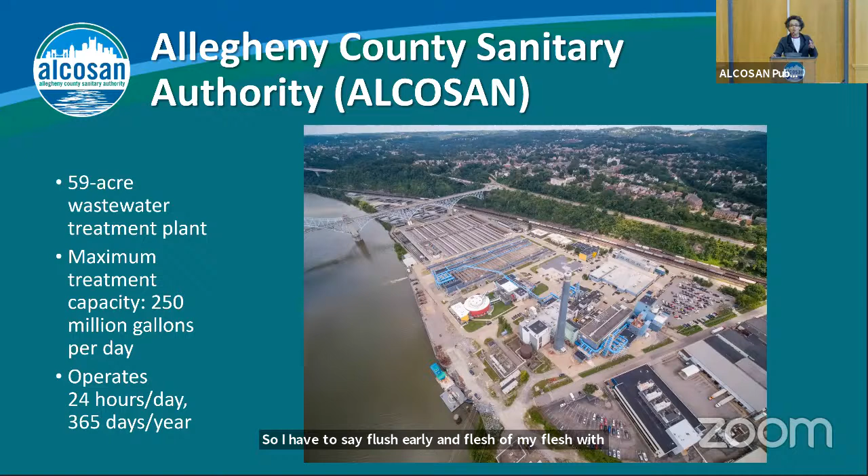Today, our agenda, again, focuses on the Clean Water Plan and provides status updates for where we are with respect to planning.

The plan has 4 primary components to improve water quality. That's what this is all about. That's what ALCOSAN has been all about since we were initially formed, improving water quality in this region.

Today, we're going to hear about how the Clean Water Plan and our ongoing implementation does just that with respect to 4 areas: expansion of the treatment plant that you just saw in the previous picture, and regionalization, our efforts to regionalize sewers within the ALCOSAN service area.

Source control and growth, that's keeping the flow out or minimizing unnecessary flow coming in, and a monetary support program - not just monetary, there's technical support, financial support that comes to bear through GROW, green revitalization of our waterways.

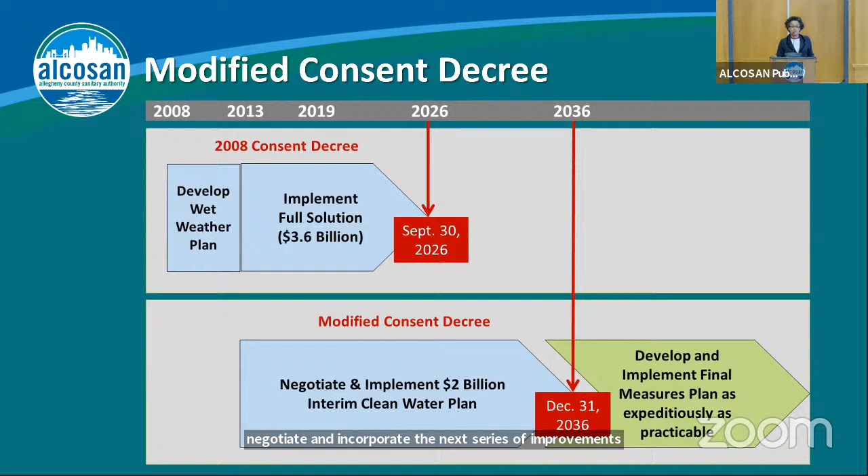A key component of being able to renegotiate the terms of the CD was gaining the ability to propose modifications as we step through this process. So again, $2 billion upfront or first phase investment in those components that you're going to hear about today: the plant expansion, regionalization, flow reduction / source control, and regional storage and conveyance tunnels.

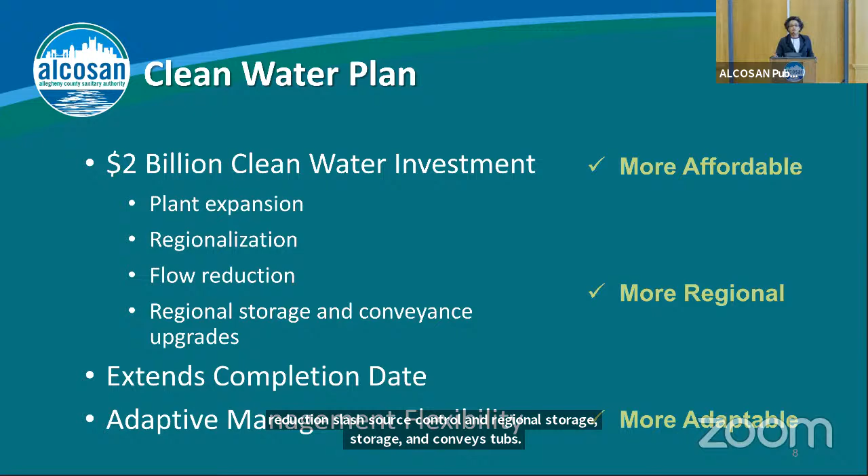The adaptive management piece is key. This simply lays out a time frame and framework for opportunities to incorporate adaptive management. And that is where we get the opportunity to step back and take a look at what we're proposing to see if there are opportunities to do just that, adapt and change with whatever makes sense at that time.

None of this do we ever do in a vacuum. We are working in conjunction with our municipal customers who supply all the flow to us. Sure, it's not surprising to anybody. We're not here generating flow. Well, we do generate some flow, but not enough to have to plan for it.

Again, the schedule, as you see it in front of you, lays out the tunneling program. It's not laying out the tunneling program because it is the only aspect of what we're doing, not because it is the primary aspect of what we're doing. Again, it is a component of what we have to do here, but it's a component with fixed scheduling right now. And as you can see, what we're trying to lay out for you here is we've got 3 tunnels that are proposed. The Ohio River Tunnel would be the first tunnel, which will be in design this year.

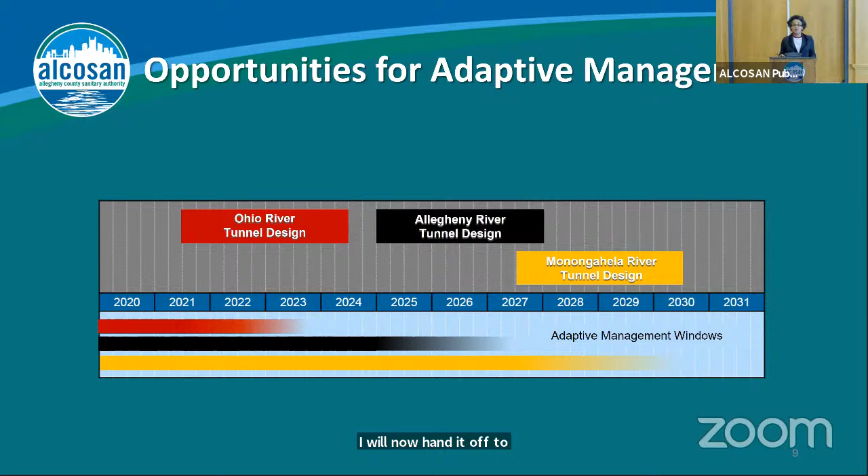This piece, the adaptive management concept, having it incorporated into our planning, I believe provides the flexibility that we need, creates opportunity for our municipalities to propose some different approaches, and meets the outcry that we heard with respect to what was originally proposed in 2012. I will now hand it off to Kim to talk about plant expansion.

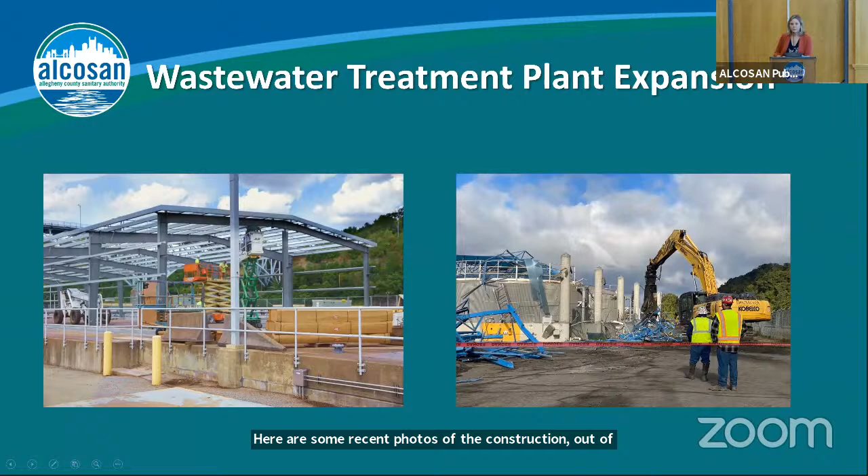Thank you, Arletta. So we are going to spend a few minutes talking about the wastewater treatment plant expansion program that we've been working on for quite a few years. Here are some recent photos of the construction down at the north end, which you'll hear a little bit more about in a few slides. Here again is our plant as it exists today with a capacity of 250 million gallons per day. We will get up to the full 600 million gallons per day with 295 of secondary treatment.

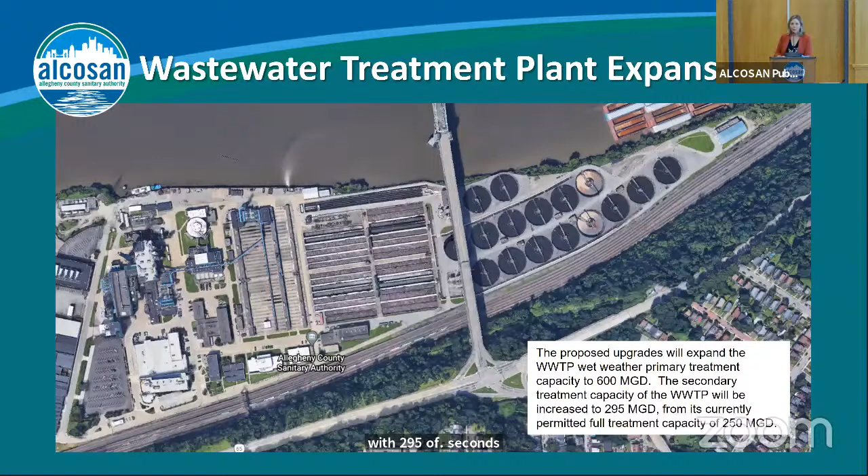How are we going to do this? Well, you can see at the far northern end of the site, those are the 2 additional secondary clarifiers and a new chlorine contact tank. That is what will expand the secondary treatment capacity from the 250 up to the 295. Right in the middle of the screen is where we will put in the secondary treatment bypass. So that is for flows over 295 but up to 600. There'll be a new outfall constructed there.

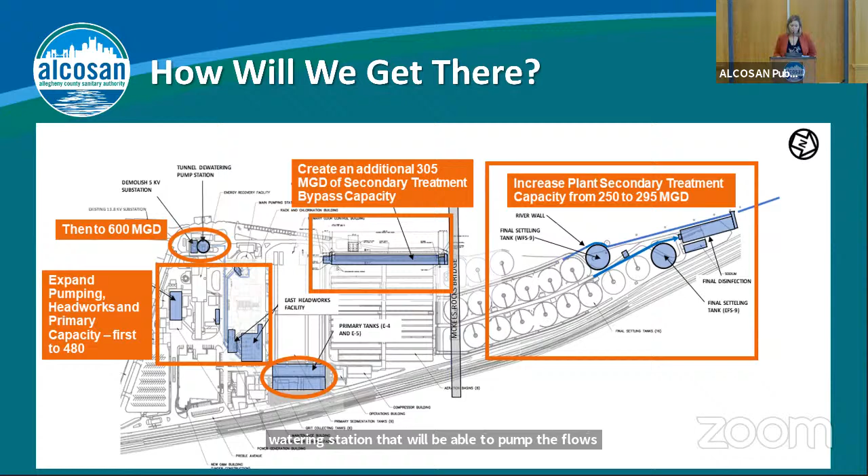Down at the bottom of the screen are 2 new primary sedimentation tanks, and then we are balancing out the expansion with increased headworks or primary treatment. And then last, but certainly not least, is the tunnel dewatering pump station that will be able to pump the flows conveyed by the new conveyance tunnels and enter into the treatment plant process.

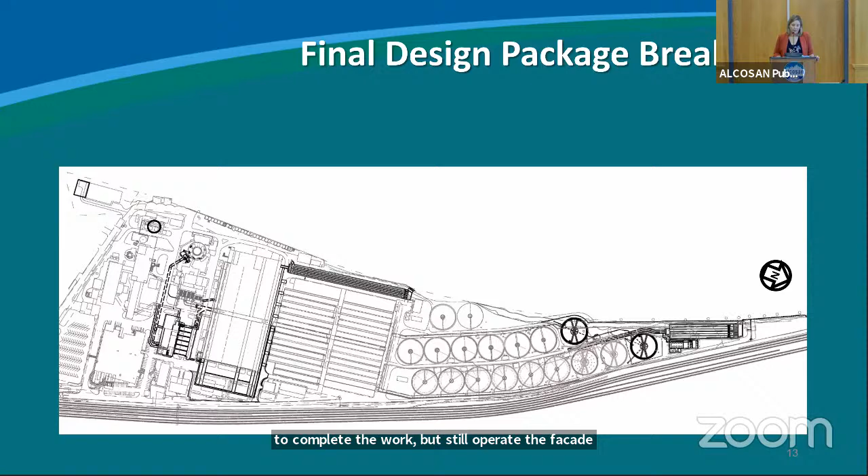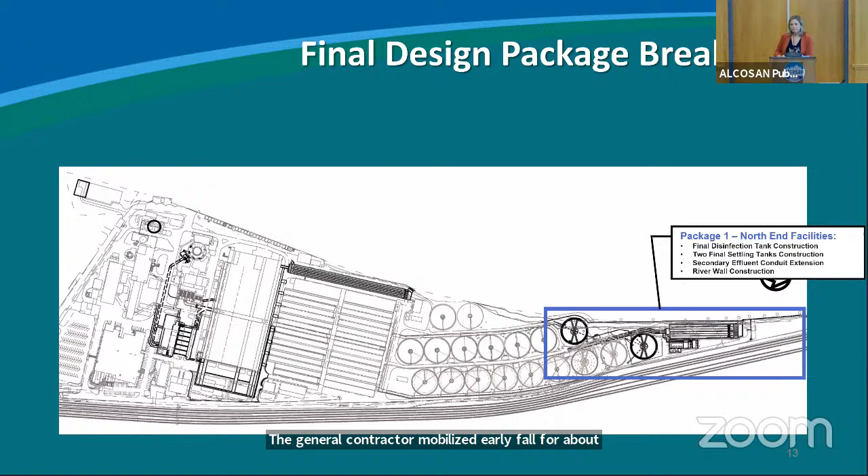So we had to break the designs into packages in order to complete the work, but still operate the facility 24 hours a day, 365 days a year. How are we going to do that? Package 1, this is under construction right now. This is what we call the North End plant expansion. We bid this project last spring. The general contractor mobilized in early fall for about $100 million worth of work.

The second package is electrical distribution system upgrades. So this is kind of a miscellaneous package. It's at about 90% design. It'll be bid this year. And this really frees the way for some of the other process improvements that are part of the plant expansion. So this is really a highly electrical package.

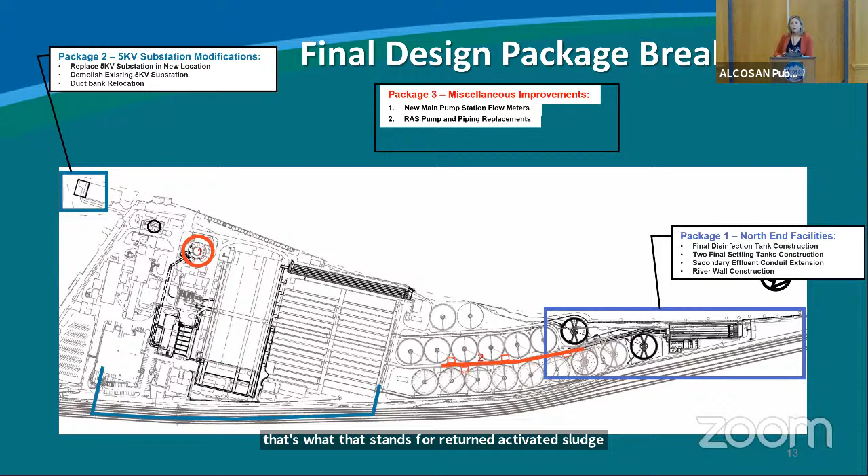So package 3 is actually comprised of 4 smaller jobs. This main pump station flow meters project is under construction. A couple of flow meters have already been installed, it's going well. The second is the return activated sludge. We see RAS, that's what that stands for, return activated sludge pump and pipe replacements. That has been awarded, and we are working through some shop drawings, and I would anticipate that the general contractor will be mobilizing soon for that work.

The third is a temporary hypochlorite facility, which is complete, and the project is operational because we had to demolish our existing hypochlorite storage facility to make way for the north end plant expansion. So that was an early project that was completed and is up and running. And then the last of the miscellaneous improvements under package 3 is some improvements to the effluent flushing water system. That's only at about 30% design, but it's coming along nicely.

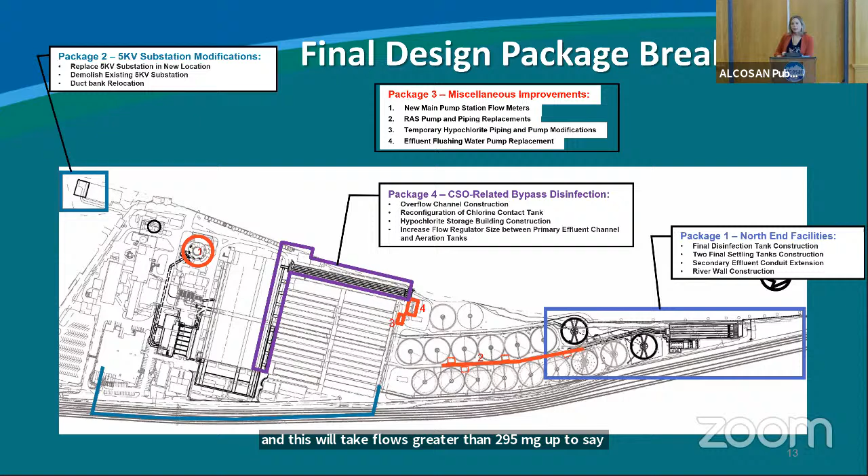Then we go to package 4. This is the CSO related bypass. This is what I was speaking of. This is a new outfall, and this will take flows greater than 295 mgd up to 600 and disinfect it. And there would be a separate outfall. Now this would only be active during periods of wet weather. This would not be active during dry weather flow or normal flow operations here at the facility.

Here is our East Headworks. So East Headworks is out for bid right now. This is probably the largest package of the final design wastewater treatment plant expansion packages. So this is brand new screenings and grit facilities, new building, and then conveyance over to the new facilities. If anybody's been to a board meeting, this would be located right outside of the boardroom where we demolished the old operations building a couple years ago. So again, that's bidding right now.

We do have to make some solids process improvements. So there will be the WAS, which stands for waste activated sludge, not to be confused with RAS, which is return activated sludge. But in any case, there will be some thickening centrifuges proposed for installation in our existing dewatering building. And that package would probably move into design later this year.

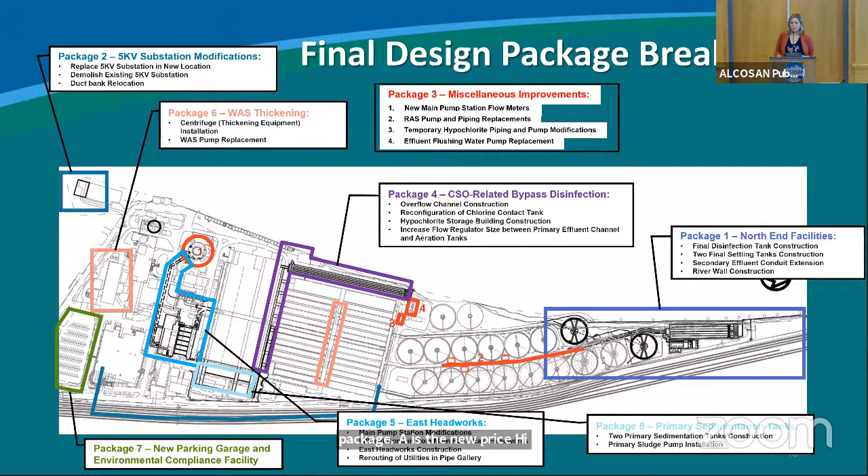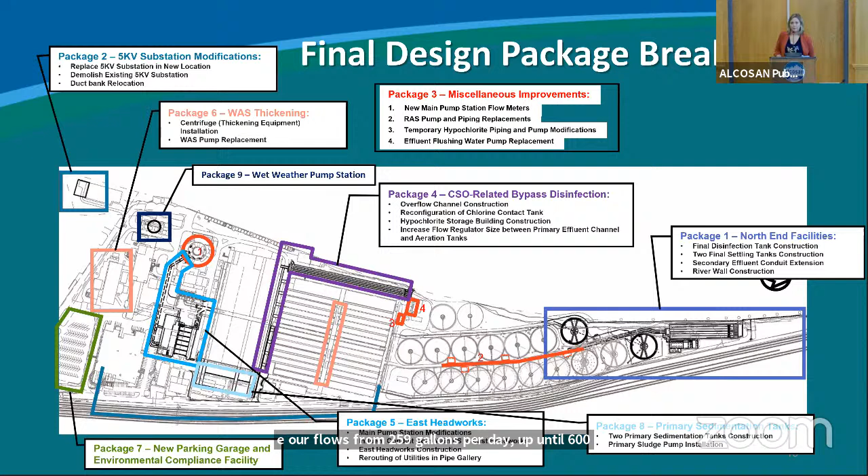Then package 8 is the new primary sedimentation tanks, which is a forcing function for needing that parking garage and environmental compliance facility. And then last but certainly not least, package 9 of 9 would be the wet weather pump station. And that would be designed and built in conjunction with the first phase of the conveyance tunnel, the Ohio River Tunnel. So that is our plant expansion, and the way that we broke it down so that we could have a phased approach and increase our flows from 250 million gallons per day up to 600 million gallons per day capacity.

And here's just a snapshot of where we are, sort of everything that I've spoken to. North End facilities are in construction. Package 2 is at about 90%. And the 3 sub-packages are mostly complete except for the effluent flushing water system, where the design has just started. We are just at the beginning phases of the design of the CSO-related bypass. East Headworks is complete. Bids are due in April.

The waste activated sludge thickening project will be out on the streets for design towards the end of this year. The garage bids are going to be due in March. And then the environmental compliance facility will be ready, but we can't bid that for construction until we have that garage built because of space issues. The primary sedimentation tank design RFQ will be the next RFQ out of the gate for the plant expansion projects. And then the last piece of the expansion will be the pump station, and that'll be a couple years yet before we go out for that design.

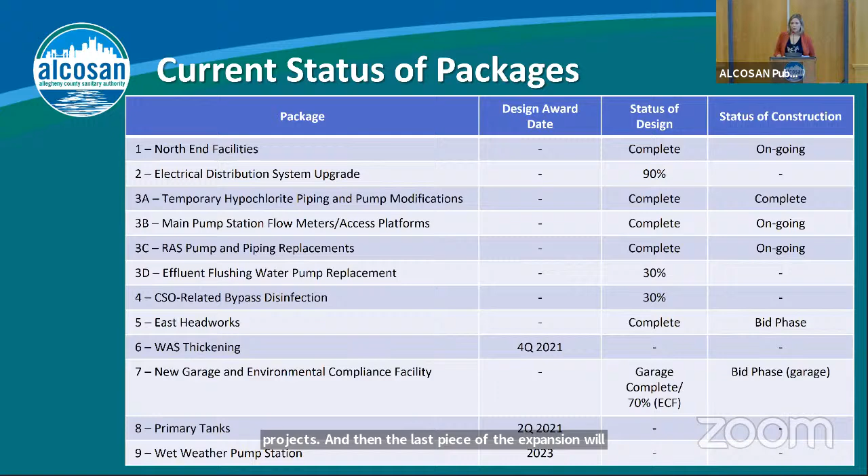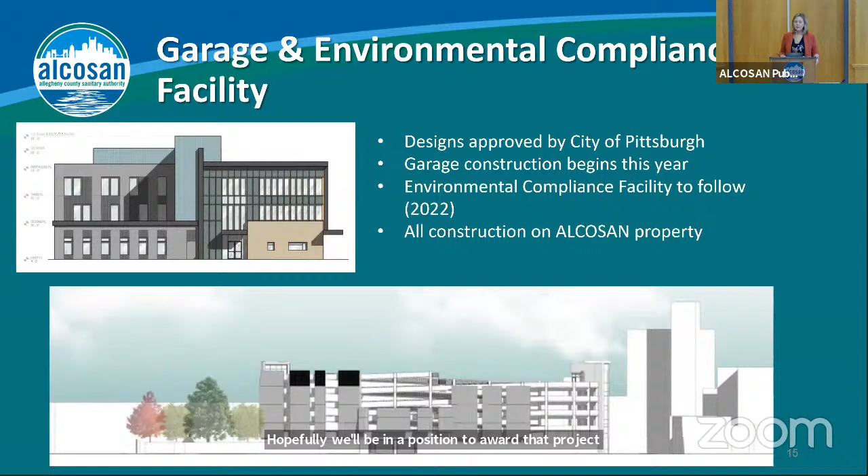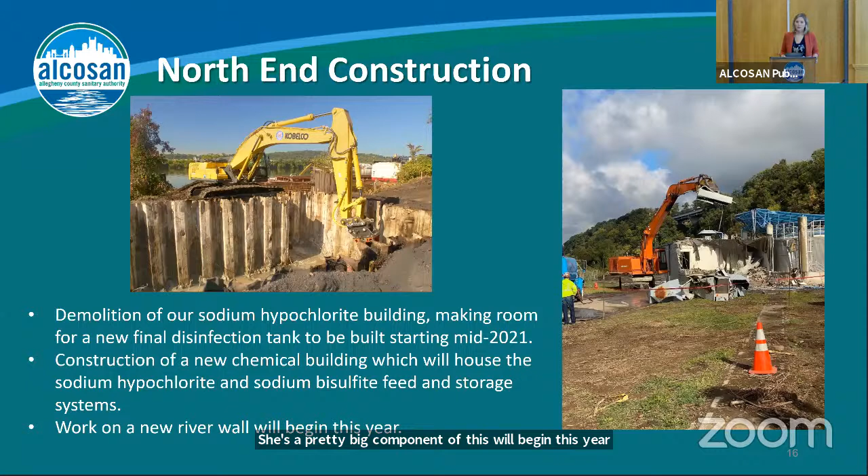And then here's just some photos from our north end construction. That has taken our secondary treatment capacity up to 295 million gallons per day. So this is the demolition of our sodium hypochlorite building, and also along the river there were some mooring cells that needed to be demoed. The work on the river wall, which is a pretty big component of this, will begin this year. And with that, I'll turn it over to Jan for regionalization.

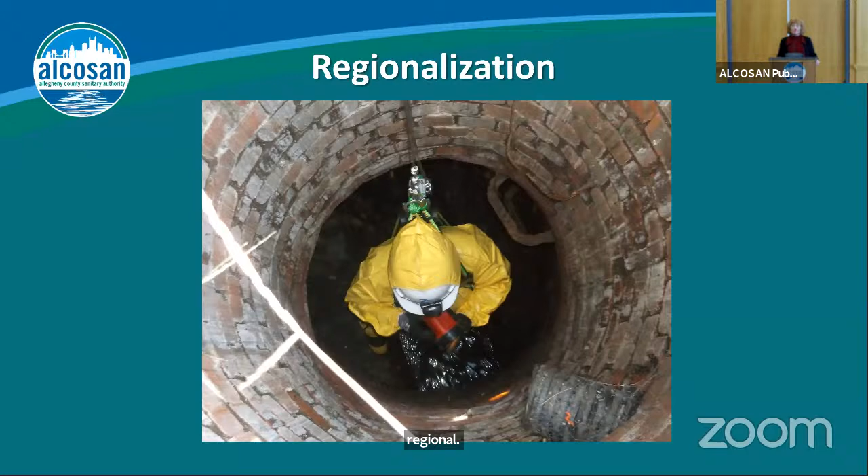Thank you, Kim. Regionalization is the component of the Clean Water Plan that includes the municipalities. We didn't get here overnight. It all started basically when ALCOSAN entered into its consent decree with the EPA, DEP, and the Allegheny County Health Department in 2008. Shortly after that, the municipalities entered into their orders with the regulatory agencies as well. It was that price tag, $3.6 billion to make these improvements, with $500 million of that being municipal improvements. So it was at that time ALCOSAN asked the Allegheny Conference to facilitate a regional stakeholder panel.

That panel consisted of environmentalists, municipal managers, elected officials, business leaders, and we all met together to talk about what portions of the municipal systems could be run by ALCOSAN. That culminated in 2013 into the Cohen Report, and it became the product of the Regional Stakeholder Panel.

A group called, which they affectionately refer to themselves as SRIC, Sewer Regionalization Implementation Committee, took it from there to determine what actual portions of the system should transfer. So in 2015, it was recommended what portions the municipal sewer should transfer, and ALCOSAN moved forward in investigating what the condition of these sewers were.

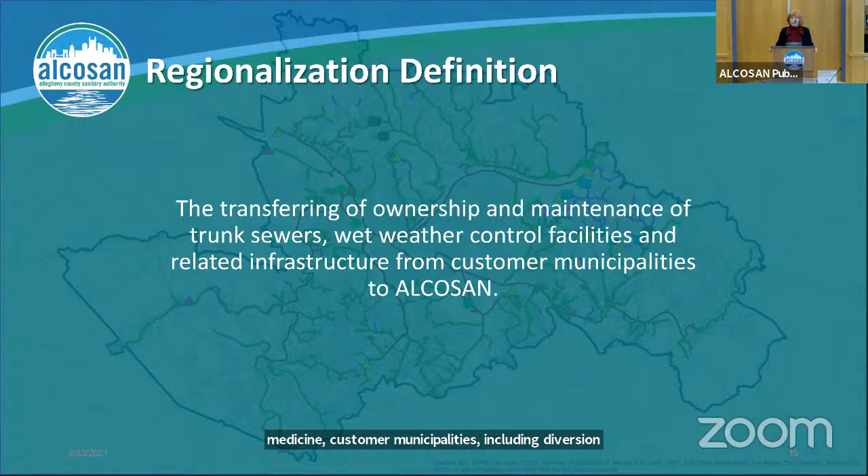So the sewers to transfer are multi-municipal sewers, meaning more than one municipality has sewage flow in that sewer. And that sewer is also 10 inches in diameter or greater. And when we did all of the inspection and went back and worked with the municipalities on the mapping of what constituted that multi-municipal sewer 10 inches in diameter or greater, we come up with 265 miles of sewers that would regionalize.

Along those sewers, there were 8 facilities. 4 of them were equalization tanks and 4 of them were pump stations. Approximately 6,200 manholes along these sewers and 77 diversion structures with overflows. These would all become sewers that would go from the municipalities to ALCOSAN for operation, maintenance, and ownership.

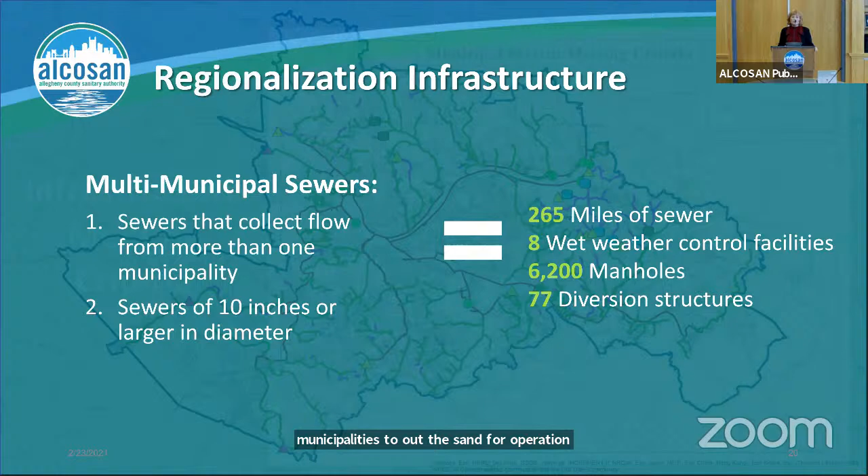This is a depiction of what that looks like. Currently, ALCOSAN has sewers that run along the Allegheny, the Ohio, and the Monongahela River, also Chartiers Creek, Sawmill Run, and Turtle Creek. It's approximately 90 miles of sewer.

So the new sewers, that 265 miles of sewer, are shown by the green lines. That would be the new sewers, the 265 miles to transfer to ALCOSAN. Our service area is delineated by the blue line. It's a 300 square mile service area.

The triangles are pump stations that would transfer as part of the regionalization process. They are pump stations that exist along the regionalized sewers. And then the cylindrical shape, those are equalization tanks that were constructed by the municipalities. They retain flow during wet weather periods and then release that flow back to the sewer system after it quits raining and flows have subsided.

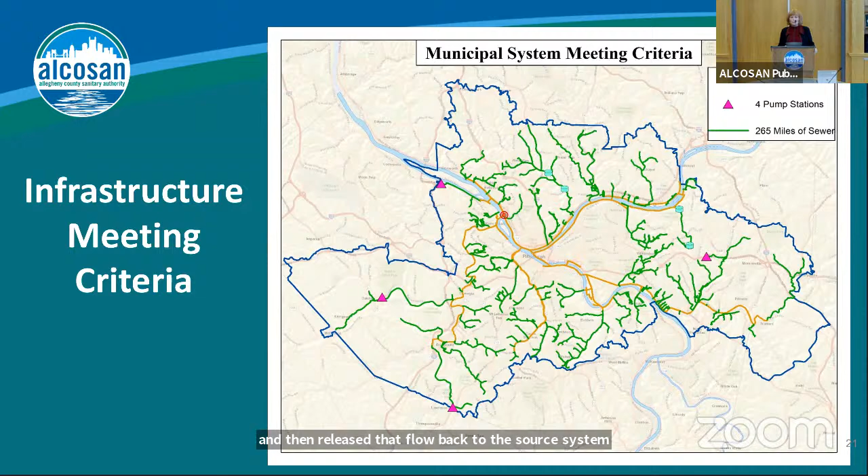So why we want to do this, I mean, in all honesty, we have minimal sewer system as it is today. The 90 miles of sewer system were constructed in the early 50s, and we just accepted that the municipalities would continue to maintain and operate their own systems.

So it's really a regionalization will bring us up to where a lot of cities are across the country that have more than that 90 miles of sewer to operate and maintain. I mean, it improves the management of the system, and there's an efficiency in the costs. The maintenance and improvements, ongoing maintenance and improvements for the clean water plan are significant.

It also promotes collaboration between ALCOSAN and its customer municipalities. So we talked about in 2010 dollars, there was a $3.6 billion price tag. As I mentioned, $500 million of that was for the customer municipalities. This enables us to make improvements that will collaborate with the clean water plan.

It establishes a regional system. That regional system will allow us to take advantage of some of the programs EPA has recently implemented. This integrated watershed approach will allow improvements to be made where you see the best bang for your buck in water quality improvements, and it contributes to the clean water plan.

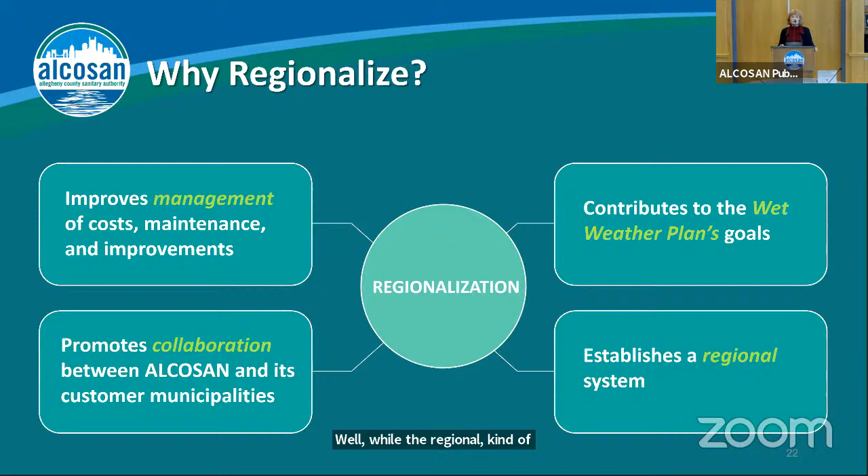Progress to date, there was a lot of planning and outreach. We did not do this in a vacuum. We met with our customer municipalities. We had almost 100 meetings to discuss the maps, the direction of the flow, and what condition the sewers were in.

We performed the inspections and did defect reports. They were developed very complete and comprehensive with mapping and sewer defects identified where they're at within the sewer system, and recommendations about what type of improvement should be made.

We did facility inspections and evaluations, and we have broken those into design packages where they are looking preliminarily at what improvements should be made to the sewer system. We'll share those costs with the municipalities on a 50-50% basis.

With the defects in the sewer, the municipalities have to make the improvements to the sewers where there is imminent failure possibilities. And then the remaining defects will become part of ALCOSAN's capital improvements program.

We have provided municipal agreements to the municipalities that identify all the needs that we have in terms of easements and past maintenance records and as-built drawings. We have the conditions of the transfer of the sewers laid out in that agreement, and we are putting those together and taking them out to the municipality currently.

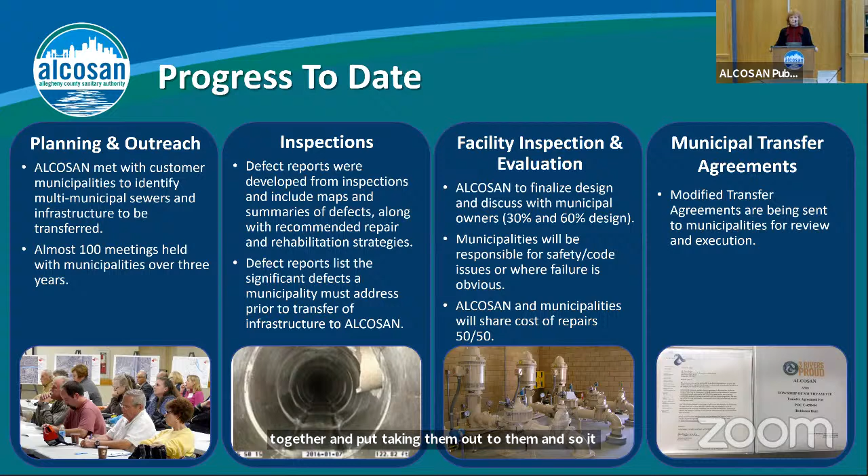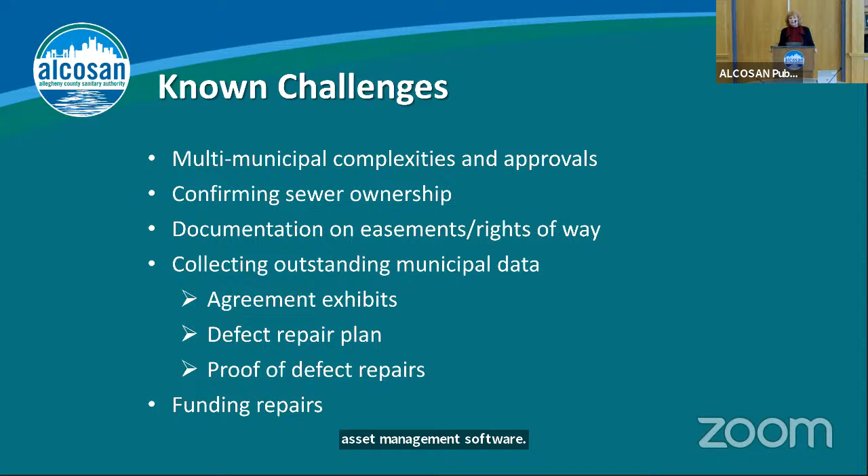We will collect the outstanding municipal data that's proof of the defect repairs. We're trying to collect that information in a manner that it can be placed into an asset management software so that we can manage the system that we will be obtaining, as well as we manage the system we have today. And just the funding of the repairs will be something that we will be challenging way into the future.

But I think in this manner, regionalization will enable it to be done in the most cost-effective manner possible. And that is my discussion on regionalization. I'll pass it over to Tim Prevost for source control and GROW.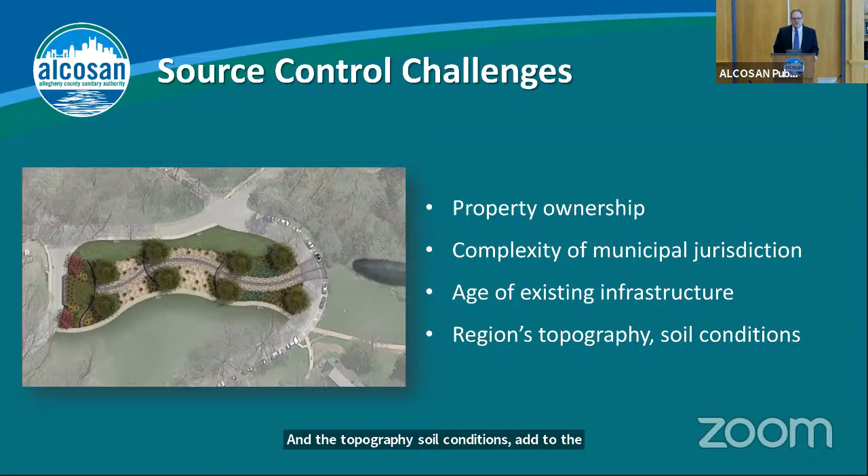How did we get here? During the development of the wet weather plan, ALCOSAN released its draft. And in the public comment, there were some concerns about the role source reductions would play in our plan. So after we submitted our wet weather plan, ALCOSAN began to meet with public officials to determine whether or not there was interest to implementing source reduction projects throughout the service area.

During these collaborative efforts, we started to pull together a report that culminated in 2015 with Starting at the Source. Starting at the Source identified several projects, over 200 potential source control opportunities throughout the service area. And it also laid out some initiatives. One of those initiatives was an incentives program to which ALCOSAN could help the municipalities fund these projects through an incentive program.

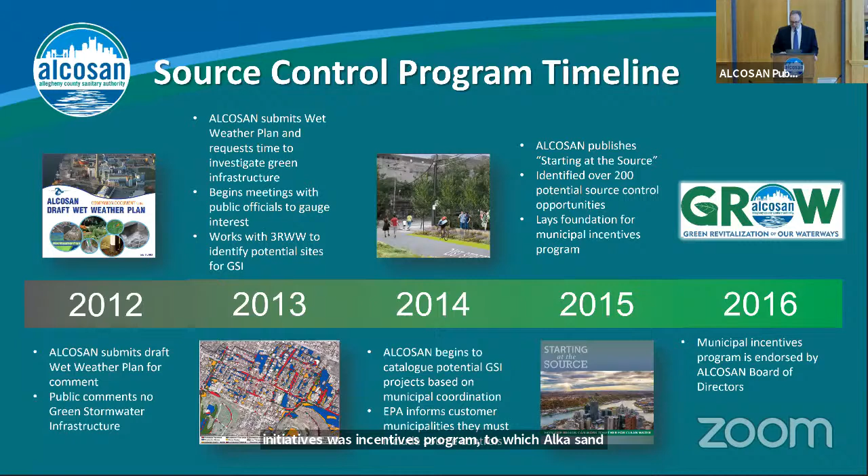To do the incentive program, you need to lay out all the different factors that would go into a project like this. And also, it needed to be fair. So the municipalities, they needed to own, operate, and maintain the projects. These would not be ALCOSAN projects, these would be municipal projects. It had to be fair among all 83 of our customer municipalities. Source controls had to be for not just combined sewer systems, but also for separate sewer communities.

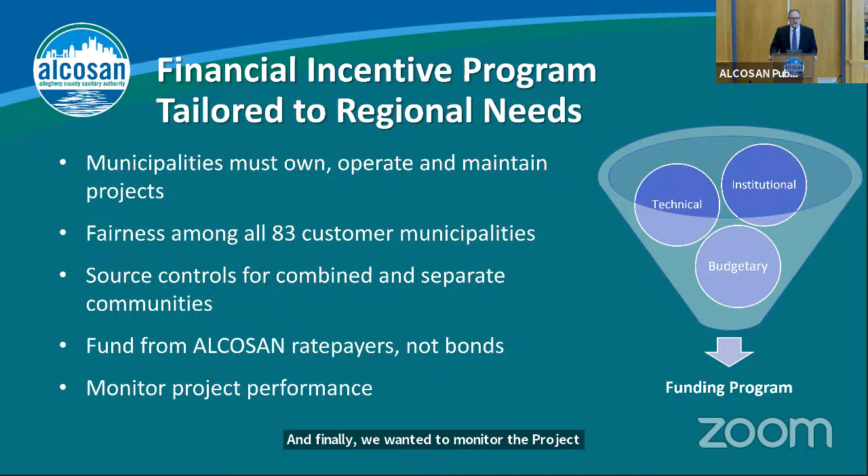One of the challenges that we faced regarding funding this was we could not use bonds because they were not going to end up being ALCOSAN-owned projects. So the funding is coming from ALCOSAN ratepayers. And finally, we wanted to monitor the project performance to show the investment that has been made to the region was well worth it.

So we started the GROW program in 2016. As Arletta mentioned before, it's about green revitalization of our waterways. The goals of the program are to construct projects that reduce sewer overflows and reduce the amount of stormwater entering into the collection systems.

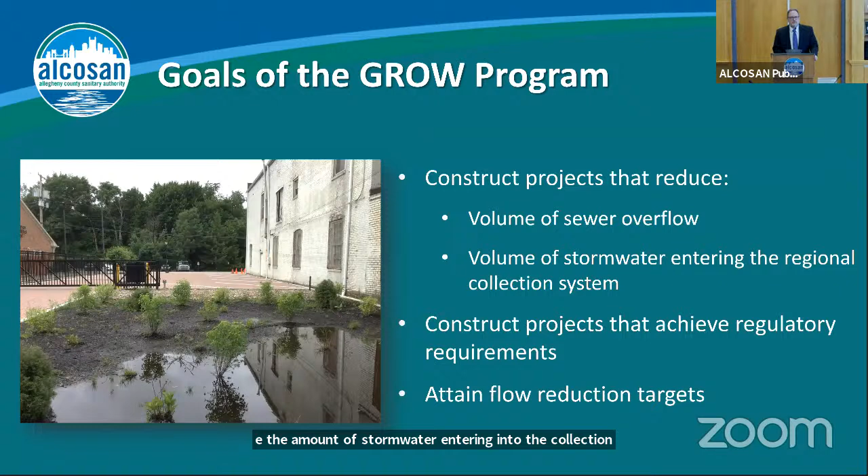These projects should try their best to achieve regulatory compliance and attain flow reduction targets.

Some of the program requirements: the main requirement is that you must be an ALCOSAN customer municipality or a municipal sewer authority within the ALCOSAN service area. If you are neither one of those, the GROW program is not eligible for you.

Through the program, we are trying to demonstrate the most cost-effective way to reduce sewer overflow volume, or the amount of flow entering into the regional collection system. That is how we determine the match that the applicant would get.

Each of the applicants must own or have the legal rights to the sites. Again, we are monitoring the progress of these projects. We have pre-construction monitoring and then post-construction monitoring, and then we make the determination of how effective this project was.

One of the most important aspects of the program is a 20-year O&M responsibility. To fund this project, we had to be assured that there is going to be a long-term obligation to the municipality to maintain these projects.

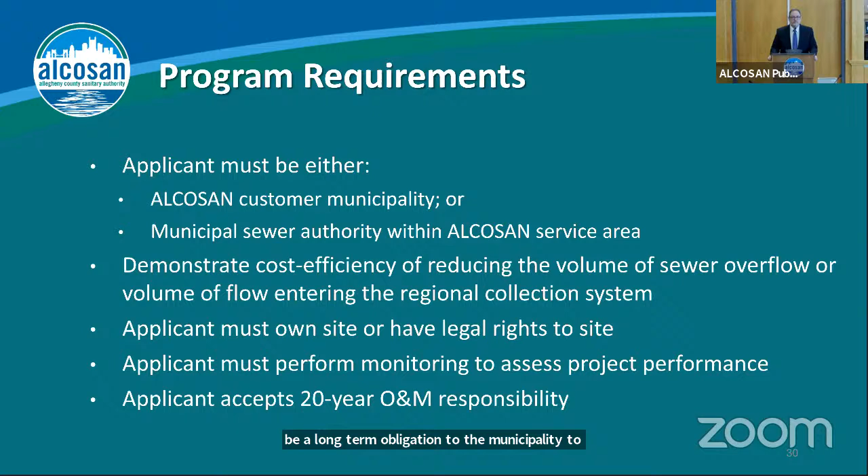There are 4 eligible project types in GROW. There's green stormwater infrastructure, which tries to mimic the natural environment in addressing stormwater coming down the system before it enters into the sewer system.

Inflow and infiltration, which addresses defects in the pipe that allow water, mostly groundwater, to enter into the sewer system.

Direct stream inflow removal: throughout our service area, we have some locations where streams were piped into the sewer system, and we are trying to get those out. That allows a lot of water in wet weather to enter into the sewer system and is a main component to some overflows. And finally, sewer separation.

Combined sewer systems might be able to have that stormwater piped into a new system and directed to a waterway, removing it from a combined sewer system.

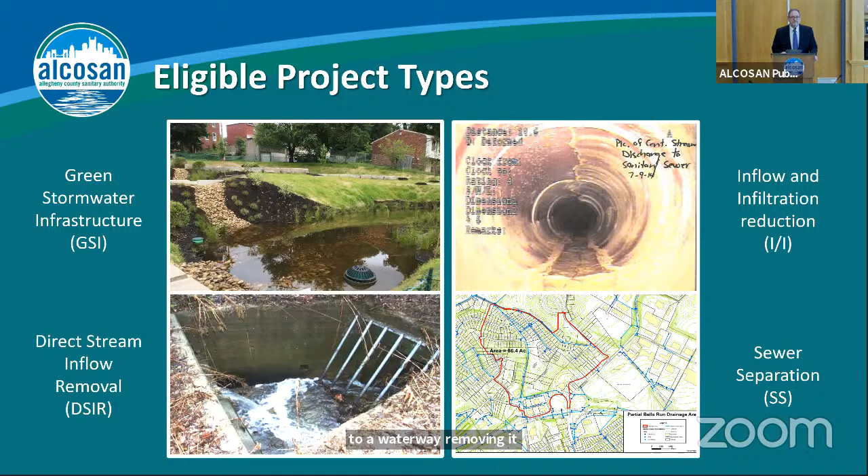When we started, we were open to conceptual designs with GROW. The award range was 85 to 25%. Our monitoring requirements were not as well defined as they are now, and we had a maximum award of $1 million per project per cycle. In that first cycle, the process was developing during the implementation.

Now, where we're at, there are certain design criteria a project must have. If it's below $1 million, it needs to be at 60% design. If it's above $1 million, it needs to be over 90% design. The award range was increased from 85 to 15%. The monitoring requirements are very well defined, and the maximum award has been raised up to $10 million per project. The process is now defined very well, to a point where it's repeatable cycle by cycle.

Some of the GROW statistics we have right now: we're through our 5th cycle. Approximately 187 million gallons of overflow reduction are estimated. We have offered $43.76 million in grants for 126 projects. Throughout the entire service area of 83 communities, 48 of our municipalities and municipal authorities have been offered and awarded grants.

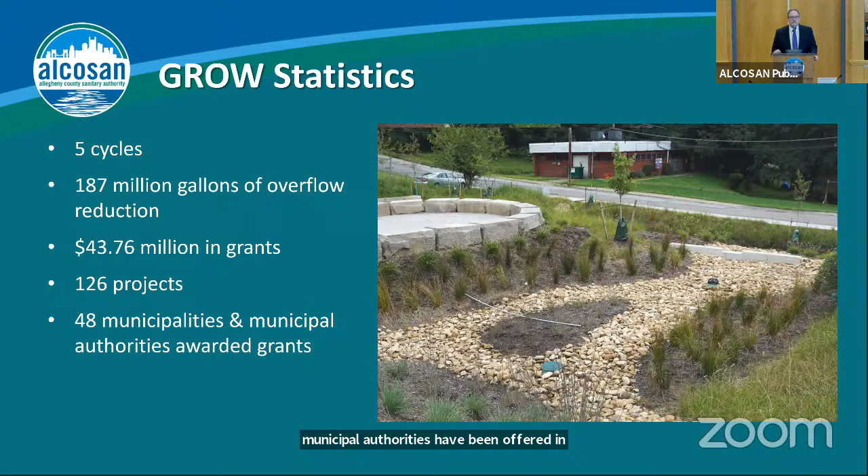So while we were implementing the GROW program, we also wanted to have a follow-up to our Starting at the Source report. That report is called Controlling the Source, and it can be found on the ALCOSAN website. We have an executive summary for someone who wants an abridged version, the full Controlling the Source report, and we also have a web map, which gives us a graphical interface of all the projects that have been identified or implemented through GROW.

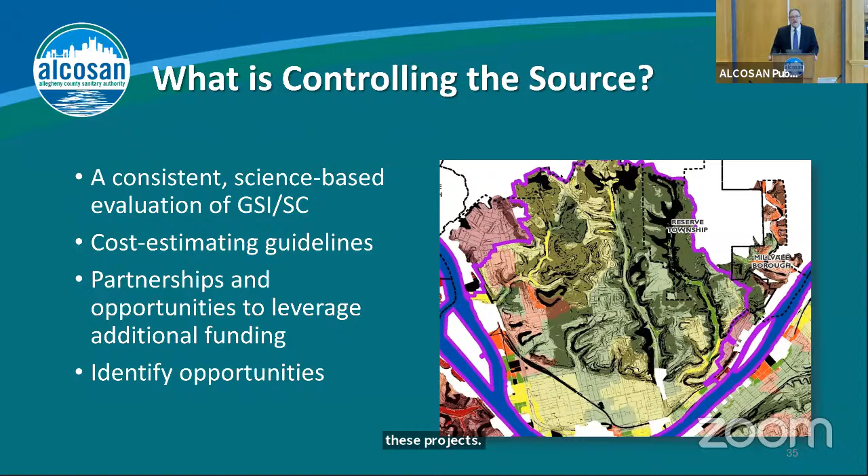So what is Controlling the Source? It's a science-based evaluation for green stormwater infrastructure and other source control projects. We identify cost estimating guidelines to give some guidance toward the most cost-effective projects available. We try to identify opportunities to leverage additional funding so that municipalities would have less of their municipal budget put into these projects. And finally, we go through the service area and identify opportunities to implement source reduction projects.

Green stormwater infrastructure is one of the 4 main source control projects we worked with. In controlling the source, we identified over 195 potential locations. Some were very strong, highly ranked projects, some were medium, and some were low ranked. We shared all of this information through the report back to our municipalities.

Of these green stormwater infrastructure projects, they are located in 20 municipalities. We are trying our best to have occasions where we can discuss these opportunities with the municipalities to see if they are interested in implementing them and working with them through GROW to help fund it.

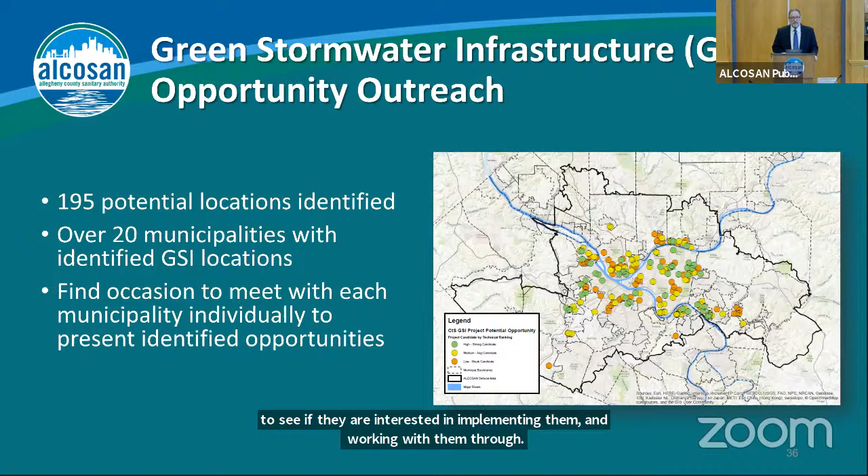Some early progress: Rankin submitted a project in their ball field in cycle 5. Currently, Sharpsburg is working on advancing a green infrastructure project in their Kennedy Park.

During the development of controlling source, we've shared concepts and background information with our stakeholders. We provided the green concepts to the communities when we published the report, and we are currently collaborating with PWSA and the City of Pittsburgh on green stormwater projects throughout the early stages of their project development, so that we know when these projects are coming. We can take an early look at how effective these projects are and also provide some collaborative feedback to them.

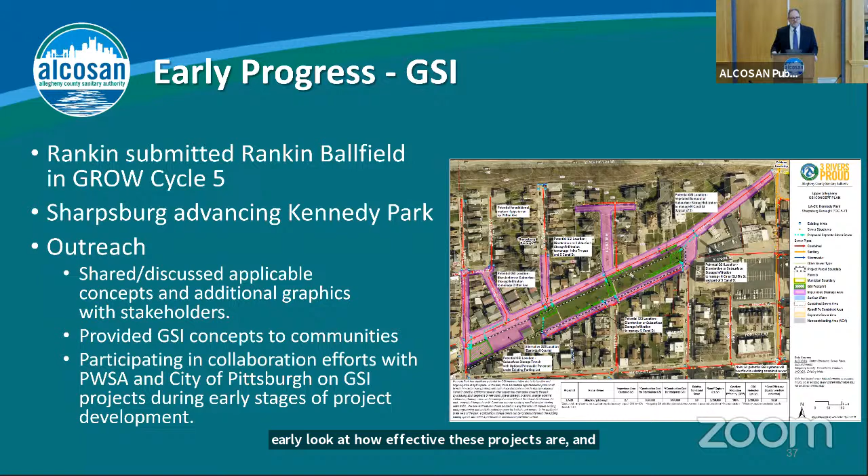I&I reduction opportunities has been in process since 2016, when ALCOSAN began doing flow monitoring throughout the service area. What you see on the left are several locations, points of connection: Streets Run, 9 Mile Run, Homestead Run. These locations are places where we did a very detailed flow monitoring program.

After we did the flow monitoring, we conducted flow isolation studies, and on the map you see the results. Areas that are in orange or red have excessive inflow and infiltration coming into the system. We will work with those municipalities to try to identify projects that address them, and if there are locations where we can overlap with defects that need to be addressed through regionalization, we're trying to address 2 programs at once.

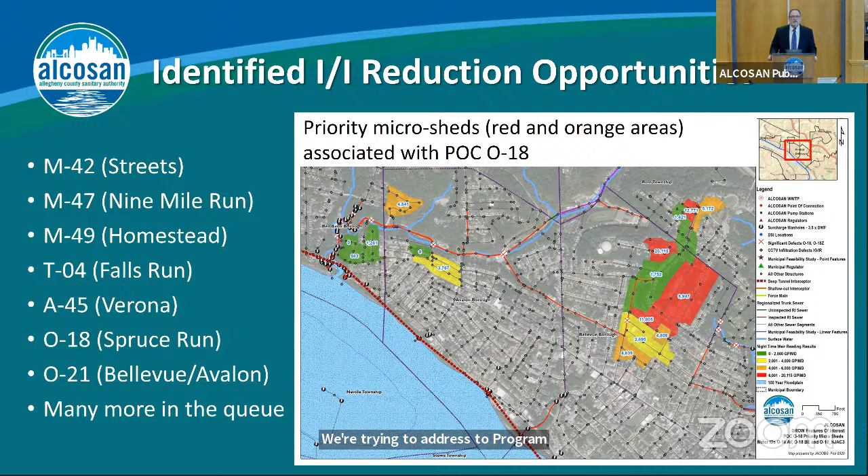Some early progress: Streets Run communities recently signed a memorandum of understanding to move forward with a major project within the trunk sewers along Streets Run and Glass Run, which will help with their regionalization defects.

We're trying to duplicate that effort in 9 Mile Run, M47, with those communities to put forward a multi-municipal I&I source control project through GROW. We're currently working with Homestead Run, Munhall Sanitary Sewer Municipal Authority, to identify where some I&I projects could be within their community.

There are more communities that we are going to be working with as we continue the monitoring programs.

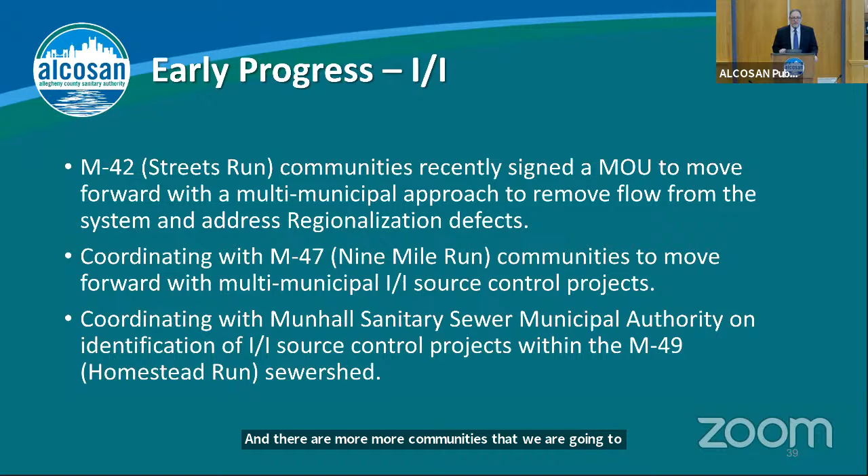Sewer separation is an opportunity that we believe is out there throughout the service area. We want to ask the question: is sewer separation more cost efficient than constructing a consolidation sewer to get to our tunnel? Is sewer separation better for overall water quality? Maybe the best answer is to keep everything the way it is and address it with green infrastructure instead. Where are the best locations for sewer separation? We are looking at all of these questions and providing answers through controlling the source.

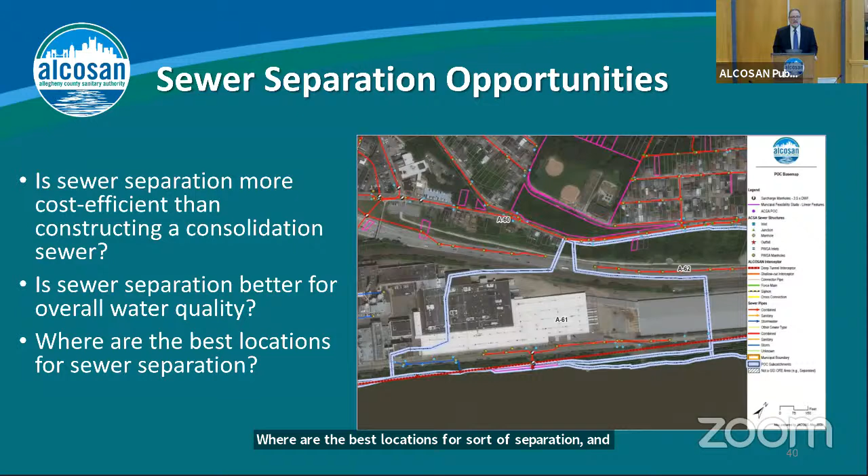Finally, we identified some direct stream inflow removal opportunities. We had previously known about 33 locations where stream inflows were located. Through some geographic information system methodology, we identified 44 new locations throughout the service area, which we validated through field visits. Based on those field visits, we identified 15 locations where we put together a feasibility study to see how feasible it would be to remove these locations from the service area.

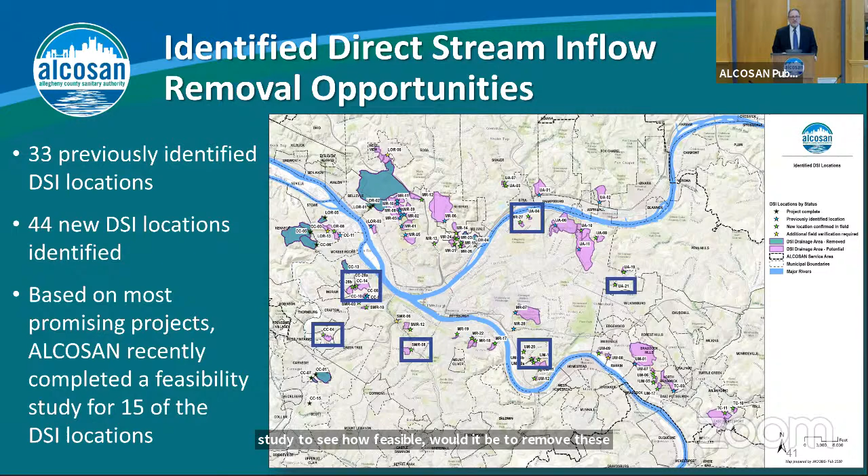Some projects currently in the queue: the Delafield Avenue stream removal is a major project with Fox Chapel, O'Hara Township, and Aspinwall Borough. The flow coming down the watershed sometimes floods Delafield Avenue. We are trying to work with the Army Corps of Engineers to find a solution to get that water out of the combined sewer system and into the river.

Currently, next door in Sharpsburg, we are working with O'Hara, Shaler, and Sharpsburg on a Ravine Street project, which is a collaboration with those municipalities and also PennDOT. Construction is to begin very soon, in the spring of 2021.

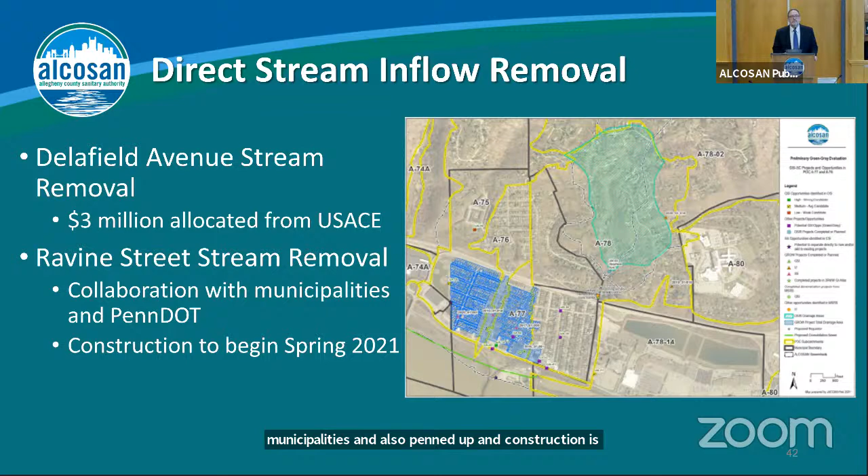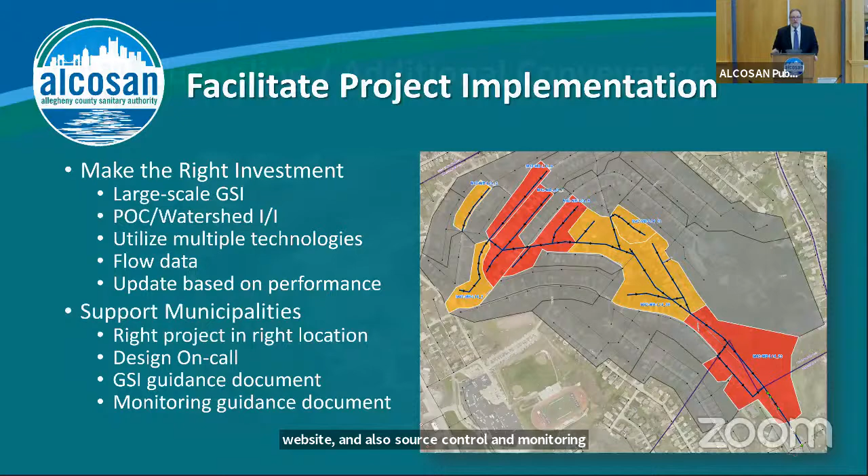With that, I'll turn it back over to Kim for discussion on the tunnels.

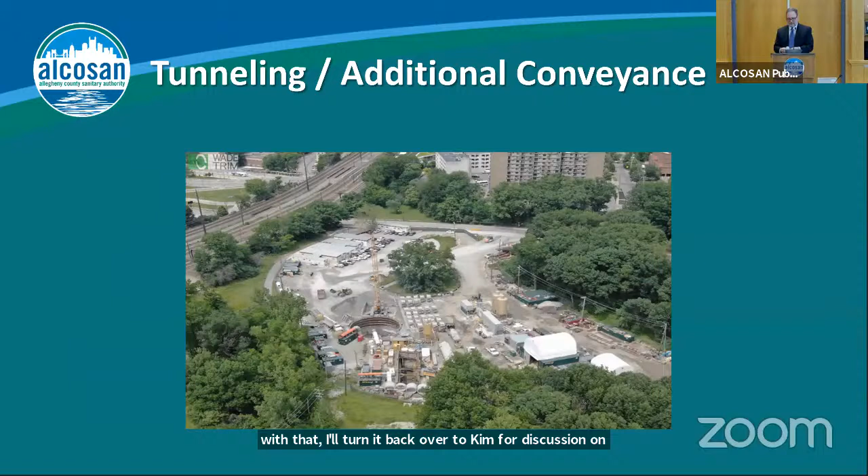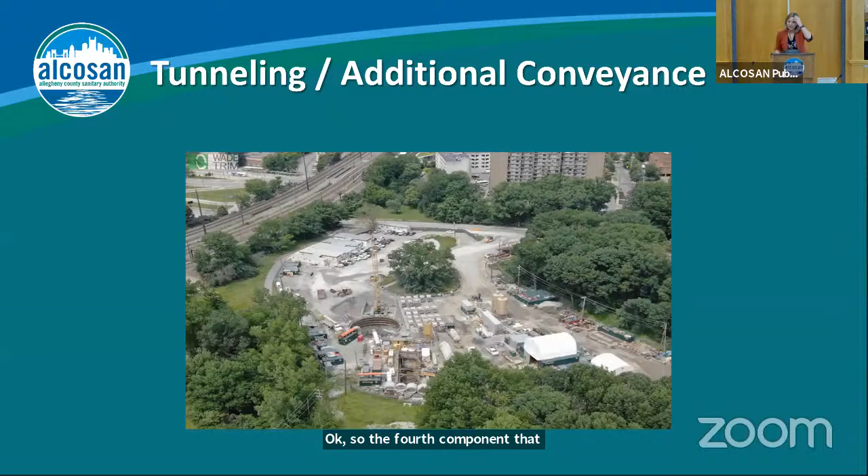Thanks, Tim. So the fourth component we're going to talk about today is the additional conveyance to get the flows to the plant. In other words, the tunneling.

In October of 2020, we met a fairly significant milestone in that we submitted the basis of design report to the regulatory agencies for their review. That was about three years plus worth of work to further dive into the new conveyance tunnels and the required associated facilities to capture and convey the flows to reduce the combined and sanitary sewer overflows. So the basis of design report recommends the size and alignment of the new tunnels and balances that out with all of the other associated elements required to be in compliance.

The preliminary planner, who is the team that did the work for the basis of design report, also worked with the wastewater treatment plant program manager and the GROW program manager to optimize the facility so that we weren't working in silos. We were looking at everything holistically to get the best solutions. The basis of design report will provide the basis for now springboarding into the final design. Like Arletta said, the Ohio River Tunnel will go into final design in 2021. The basis of the design has been laid out in this report.

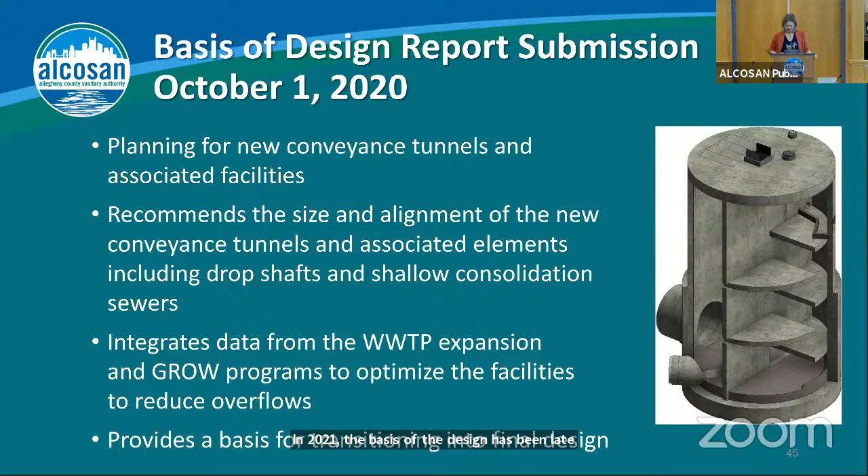So the associated systems we speak of include the tunnel legs, but also regulators, consolidation sewers, and the drop shaft - basically a vertical sewer to take the flow from the surface sewers down into the deep tunnel - and the adit, which takes the flow from the drop shaft over and connects it into the tunnel. These are the associated facilities with the tunnel system, and words we'll be hearing for the next couple of years.

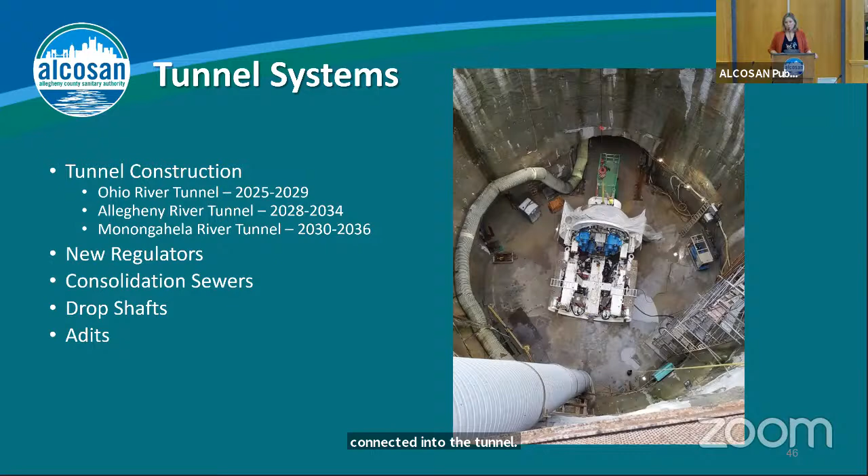So here is the current proposed horizontal alignment. Here is the Ohio River Tunnel, 18 feet in diameter, about 24,000 linear feet. Next in the queue would be the Allegheny River Tunnel, again 18 feet, 28,000 linear feet. And then last but certainly not least is the Mon River Tunnel, again at 18 feet. So the whole system is at an 18 foot diameter.

And then there is a Chartiers Creek Tunnel that will go over and pick up the McKees Rocks area, the bottom of Chartiers Creek, proposed at this time at 14 feet diameter. And then last but certainly not least is our river crossing over to Saw Mill Run to pick up the bottom part of Saw Mill Run. So that right there is our current proposed horizontal alignment as laid out in the basis of design report.

Pay attention to the notes on the side - these will be refined further as we get into final design. This is at the 15 to 20% design at this time. There will be very little disruption. This is very deep, 150 feet deep on average, so the only surface disruption would be when we are connecting to the tunnel at our drop shaft locations. ALCOSAN will be working with the applicable neighborhood organizations throughout the design and construction phases, really to work and coordinate our work with all of you.

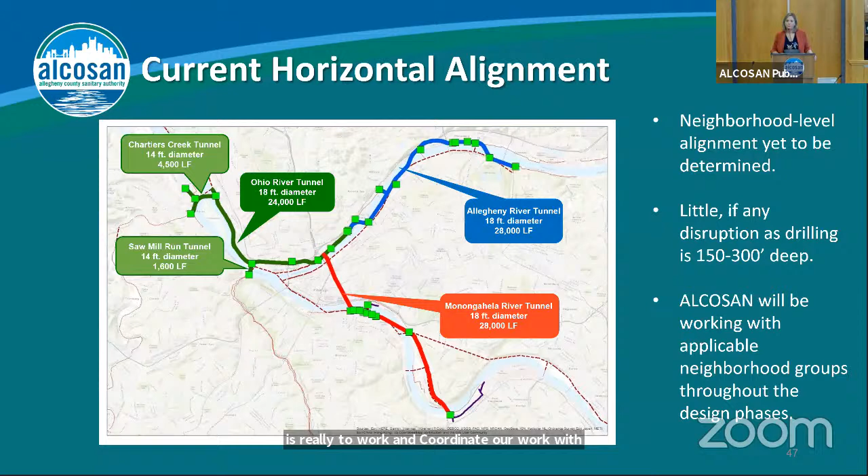We've done about 77 deep geotechnical borings to date. There will be many more geotechnical borings forthcoming during the final design phases, but getting a very, very good understanding of the geology will be a critical component of the final design process.

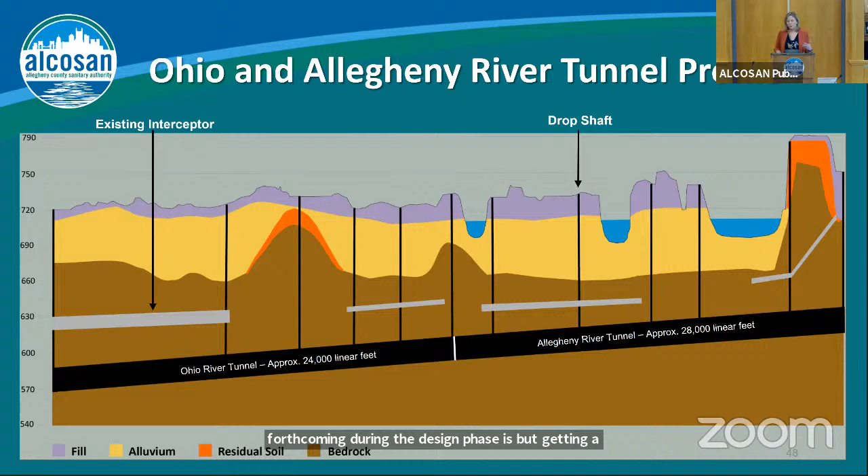So these are sort of some of the highlights that were established through the basis of design report and the preliminary planning process. One pass system is what is being proposed. We have been looking at the best approaches for groundwater control and have put forth some recommendations, and we'll continue to look at that for what's acceptable in the industry and what other communities have also learned from.

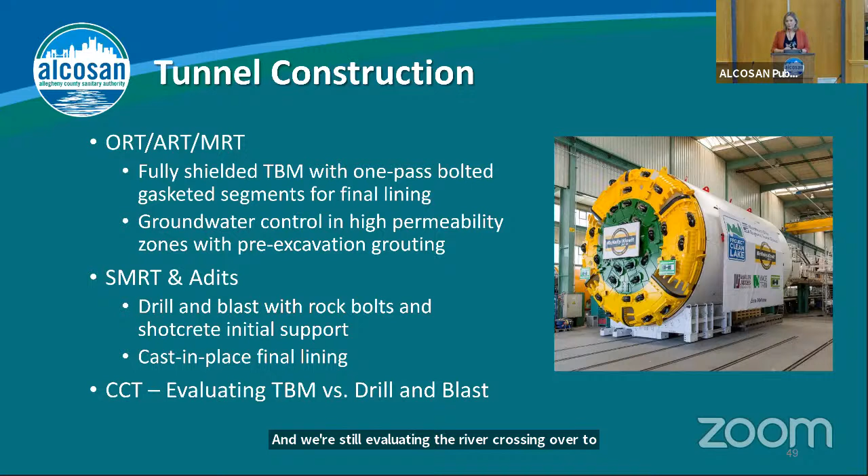So the adits, which are the connections from the drop shafts over to the tunnel, and then the Sawmill Run river crossing, those are proposed to be drill and blast. And we're still evaluating the river crossing over to the Chartiers Creek to pick that up, whether or not that would be a tunnel boring machine or drill and blast. So those are some of the decisions that will be made as we move into final design.

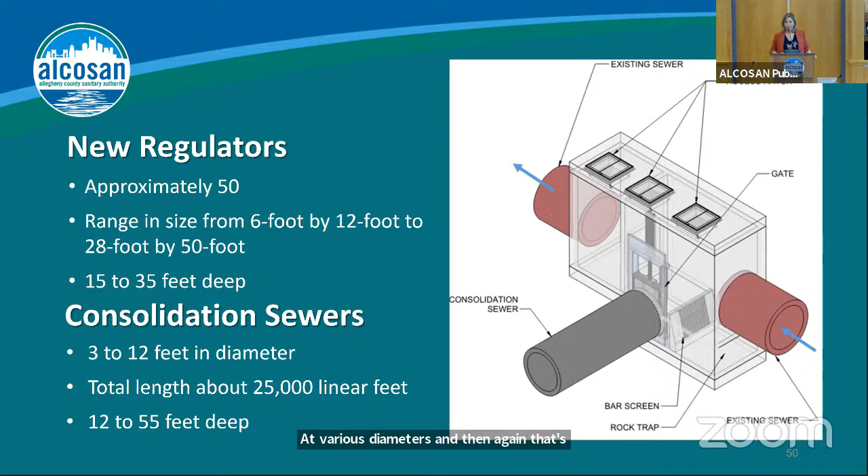And then we've got to get the flow to the regulators, and that's where we will be proposing consolidation sewers at various diameters. And then again, that's based on the modeling and what we've seen of the flow that we need to pick up.

There will be about 20 drop shafts required for all 3 legs. There's various types of drop shafts that would be identified under final design to see what's most appropriate for each of the locations, what type of flow they're going to see, and also, you know, where it is in the system, how much closer it is to the plant, whereas it's further away, and the diameters range. And then the adits, the connections from the drop shafts over to the tunnel, would typically be 8 feet in diameter.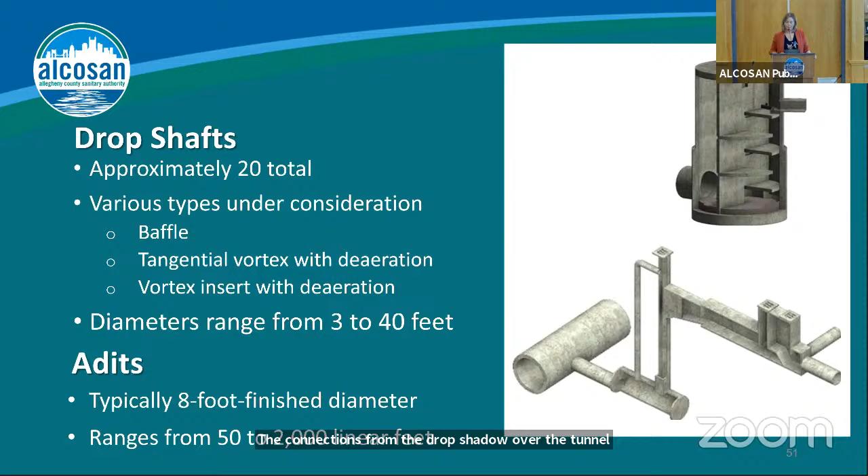So back to what Arletta was saying earlier, adaptive management. I mean, this is a key component of the modified consent decree. It's a key component of the Clean Water Plan. So we will continue to coordinate and work with our municipalities through all phases of the Clean Water Plan implementation.

The one thing that I would like to point out is that municipal source reduction agreements are due, as specified in the modified consent decree, by 2025. So if you have a project that's in the queue that you're thinking about, please start to communicate with ALCOSAN now and start to talk to us so that we can understand and start to plan for it appropriately.